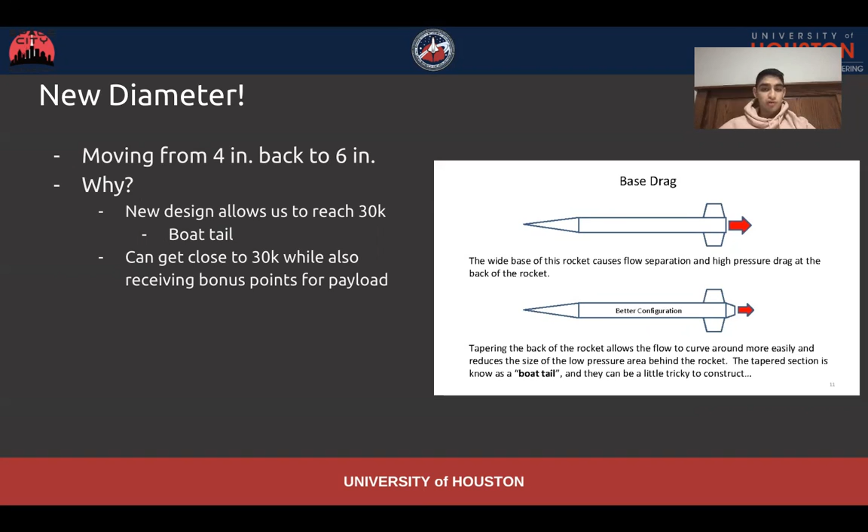And in addition, this can also get us close to 30K while also receiving bonus points for payload. So leads and everyone have decided that a move back to 6 inches would be best for everyone involved. Now on the validation team side, I'll talk about the new OpenRocket and RockSim design as part of this change, and then go more into the nose cone drag calculations and determining that optimal fin shape and location.

So the new OpenRocket and RockSim design, I'll take on this and hopefully have it completed by the time lab starts tomorrow. If not, it'll be for sure completed by the end of our lab time tomorrow. And then Irvin's design is what he came up with, but I know there are some slight inaccuracies and we can try and adjust a few things, move some things around, see if we can get an even better apogee.

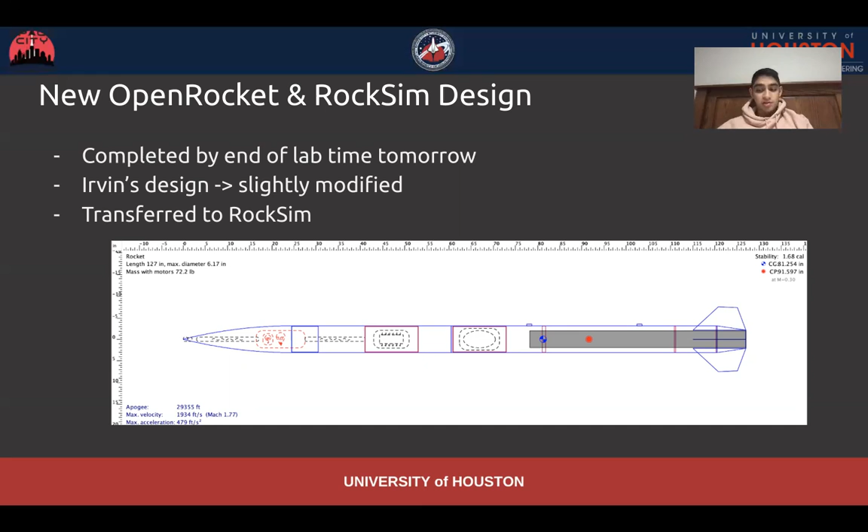And then once I have an OpenRocket design, I'll move it over to RockSim and then update all the weights and components in there, and then upload both files to the drive once I'm done so that it can be used in reference for the nose cone drag calculations. So we do need to update that simulation for the new design.

And I guess through finals and during the beginning part of break, I did realize that there is a way to actually export the full package of data from launch to landing from RockSim. So I want us to use both the RockSim and the OpenRocket data for this new nose cone drag calculation. We can have one of just RockSim, one of just OpenRocket, and maybe one of an average between the two. And then from all of these data and simulations, we still want to ask, is von Karman the correct choice?

It should be noted that when Irvin was messing around with this design, he originally fitted the design with a von Karman nose cone. But after changing to an ogive, he noticed that he did gain around 1,000 to 2,000 more feet in apogee. So hopefully the nose cone drag calculations can verify that. If not, then we'll see how they respond in the simulations and with drag and make the correct choice there.

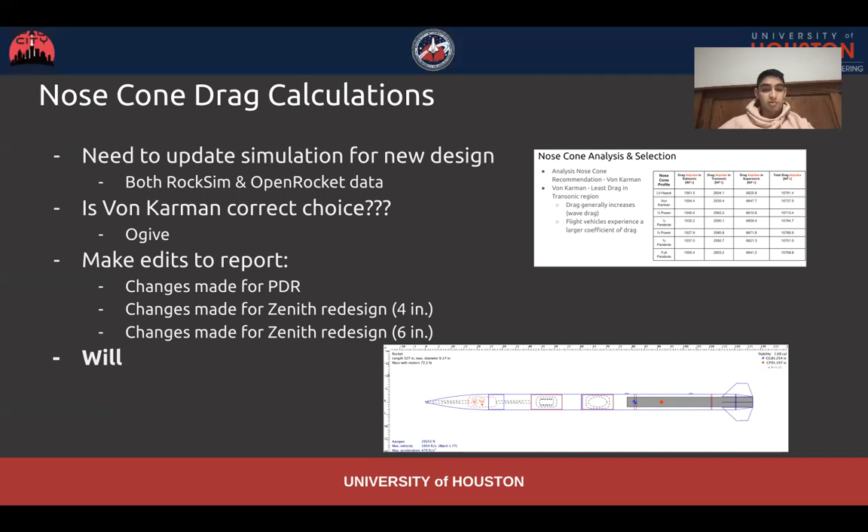Some edits that need to be made to the report are changes made for the PDR, changes made for the Zenith redesign to 4 inches, and then the changes that we made for the Zenith redesign to 6 inches, along with each of those designs' corresponding data and analysis. So Will, I know you've been working on this for a while, so I feel like it'd be best just to leave you up to this. And of course, I'll be there to help you along as well.

Now, fin design. So something Irvin and Alex were also messing around with was the number of fins and how that affects apogee and stability. So first, I want us to determine if 3 or 4 fins is better suited for our design. I believe Irvin's current OpenRocket design has 4 fins. And then Mic, I know you put together some simulations and findings in that Google Doc from before. So continue to use those.

And I'd argue that fin design is even more important than before. It has a massive effect on stability with this new boat tail. So getting this right is absolutely essential. And along with the simulations, I want you guys to think about the physical boat tail itself and any limitations that may come with it. Obviously, structures is going to be a good resource there, as if we come up with a design but it's not able to be manufactured, then it's pretty much useless.

So we want the best possible design that can be manufactured. So think about those physical limitations as you're performing these simulations. And I'd recommend to define some strict boundaries, and then within those boundaries, start to optimize for what fin could be best.

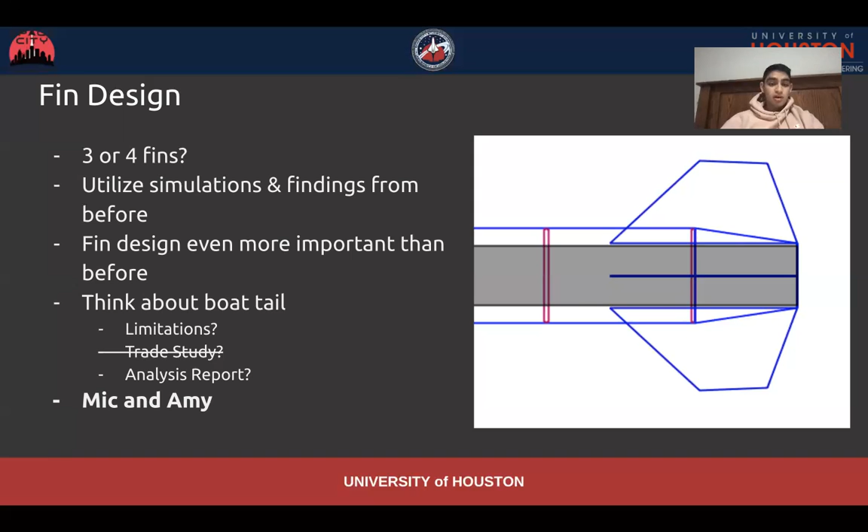And then a corresponding analysis report, hopefully once we finish and formally decide on a fin design, it should be written. And Mic and Amy, if you could take care of this, that would be great. Now moving on to the design team, I'll talk about the Oberon MMM FEA. Hopefully we can finally get that off our backs. And then the Zenith CAD, and also most excitingly, I think, starting to learn CFD.

So for the Oberon MMM FEA, I think at this point, we just need to maybe simplify a lot more. And one way that was suggested in the PDR and by Gustavo was to just look at the thrust plate and then apply a dynamic load to that thrust plate for the duration of the launch, and then maybe an impulse force upon landing. And if it can hold up against those forces, then we can conclude that the MMM is suitable for flight.

And then also more forward thinking, I want Arturo and Omar to decide on another area of the rocket to analyze. Three events or areas I thought of was the boat tail itself, maybe separation of the nose cone at apogee and for the main, and the forces interacting with that whole system, and talking to recovery about that.

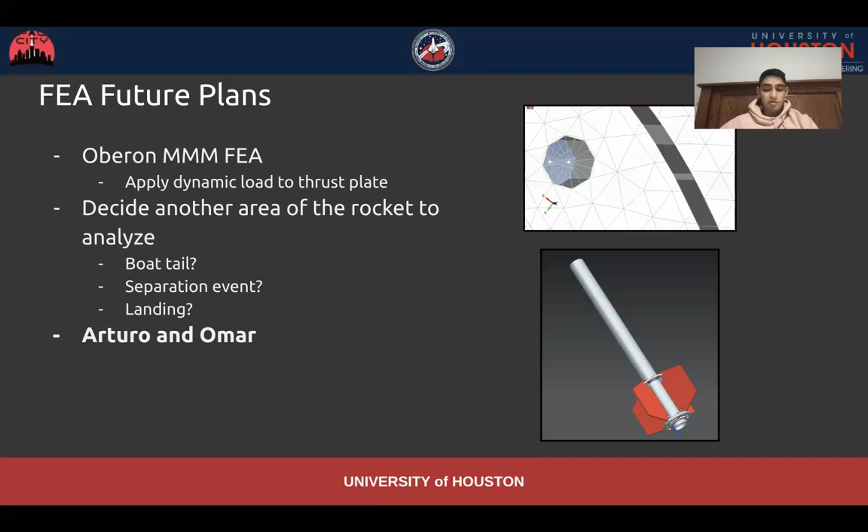And now our Zenith detailed CAD. Not too much to say here, just because I do not know the status of where we're at with this. So an update on that would be wonderful. Other than that, continue to talk to other sub teams, make the change back from 4 inches to 6 inches, and an accurate representation of their system, along with recovery and avionics.

And maybe helping them out with some of the CADs that they wanted to draft. I believe both of those sub teams want to start getting some CADs done of their systems. So offering your help there would be great as well. And then once you're complete with this, I want you to move on to learning CFD, which I'll talk about in the next slide. But this is for Cristhian and Nicolai.

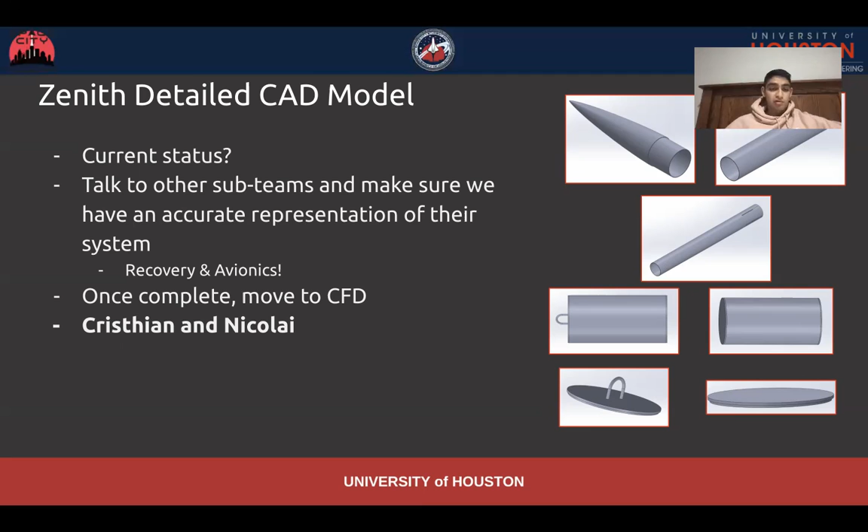Now, learning CFD. The software that we'll try to use is Siemens STAR-CCM+, and hopefully we can all download it without any issues. But really, I just want us to start watching YouTube videos, find those learning resources, and begin to research how we can utilize CFD. And the biggest question here is, how can this help the team? So Jacob, I'd like for you to start thinking about areas to analyze. Off the top of my head, the nose cone and the base drag come to mind.

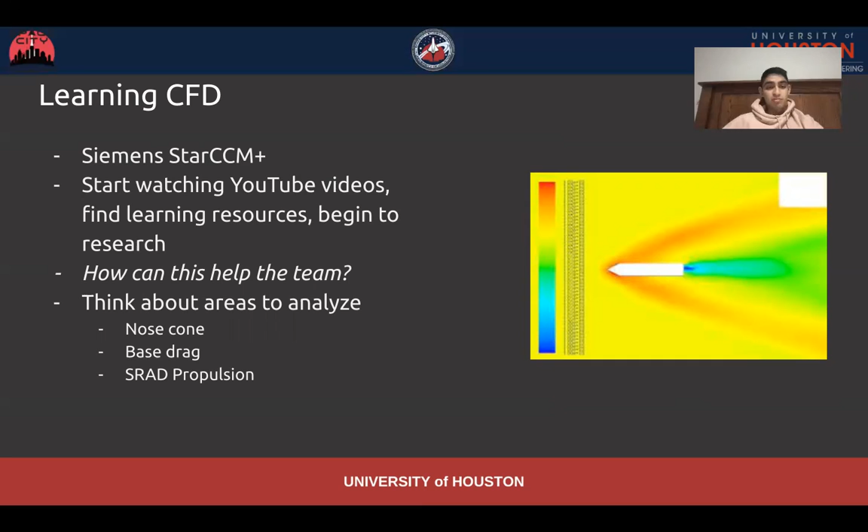But also, in a separate application of CFD, I know SRAD Propulsion was looking into how they can incorporate the liquid side of their hybrid motor, and using CFD to determine some things on that end. So the priority is obviously Zenith, but any help we can offer to SRAD Propulsion in the future would be great for the team down the line. So Jacob, if you could get a head start on that, and then Cristhian and Nicolai, once you finish up your Zenith CAD responsibilities, moving over to CFD would be wonderful.

So now just closing it off with some action items. Will, as I mentioned, taking care of the nose cone drag calculations using both OpenRocket and RockSim. I'll help you out with that. Mic and Amy looking at the boat tail fin design, and Arturo and Omar looking at that dynamic analysis and load on the thrust plate for the Oberon MMM FEA, and then starting to think about other areas to analyze.

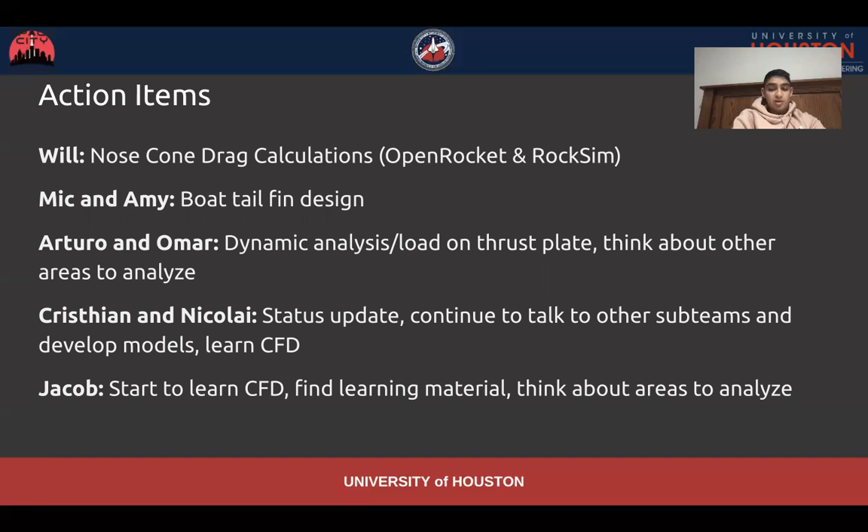Cristhian and Nicolai, a status update on your Zenith CAD and continuing to talk to other subteams and developing those models, and then moving over to help Jacob learn CFD. And then lastly, Jacob, starting to learn CFD, I want you to focus on finding learning material for the team, and also starting to think about areas to analyze.